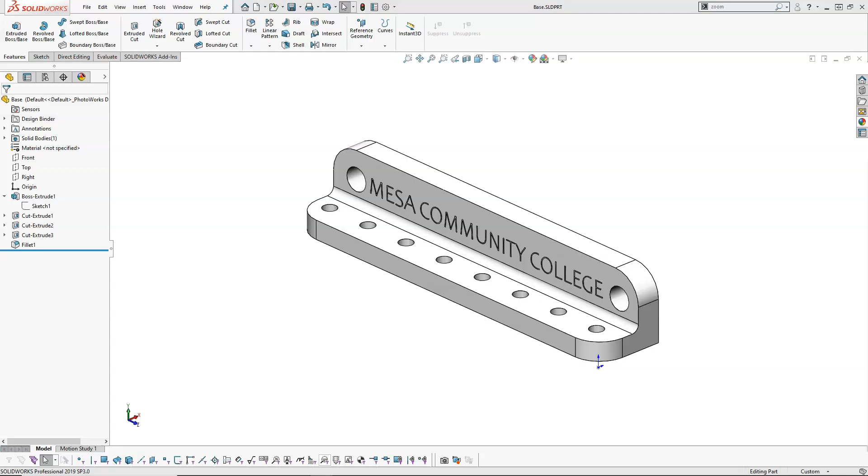The dog bone looking piece is actually going to be 3 parts. We have the crank at 50 millimeters, the follower at 80 millimeters, and the coupler at 160 millimeters. So we need to open up a new part.

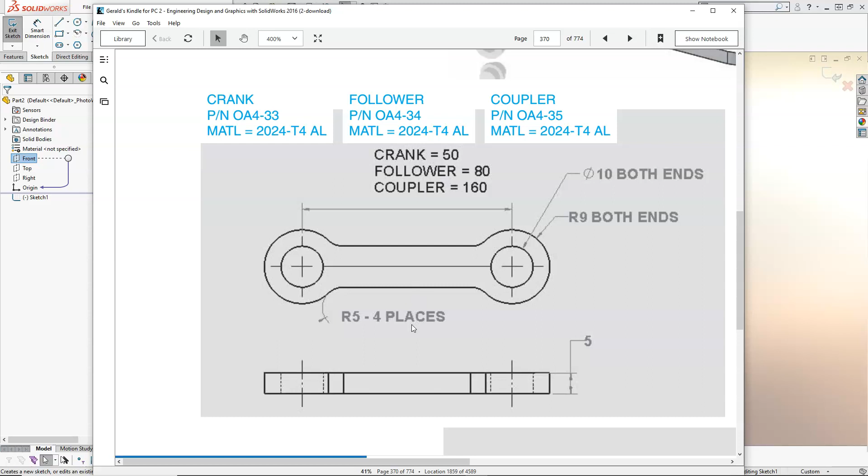And we're going to go through the same basic process. I'm going to open up a sketch this time on the front plane. And for our geometry, I can draw 2 circles. And really I just want to make these very simple. Not quite ready to go into symmetry yet. Maybe we'll establish some symmetry with a center line or one piece of geometry, but eventually we would mirror this geometry or create our symmetry.

So if we go that route, I don't often use the midpoint line. So in our line we have line, center line, and midpoint line. And midpoint line is going to, we pick the origin, and as I drag it's going to go both directions. And I don't know if it's going to give me that dimension or not, but let's go with 25 before I let go of the left mouse button. Put in the 25 and hit enter. And what that does is it puts in the parameters of 50 millimeter, but there's no dimension to drive it.

Alright, so my endpoints are still in blue, and I don't really want this to be an object line for what I'm using it for, so when I select, I'm going to switch it over to for construction, and then we can apply the dimension. And I get the 50 millimeters, which is what I entered. So that portion of it, it maybe saves me 1 step, but I'm not overly fond of the numeric input. It doesn't work with my workflow, so I'm going to go ahead and turn that back off.

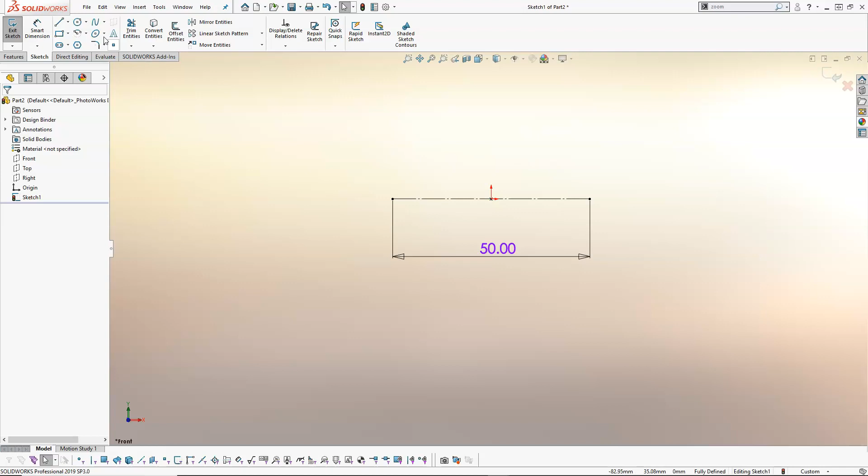But it does give me some locations to place my circles, and as long as I can select both of those, so select the first circle, hold down the control button, select the second circle, and I'm going to set those to make equal or come over to the left and equal. Then I'm going to do the smart dimension.

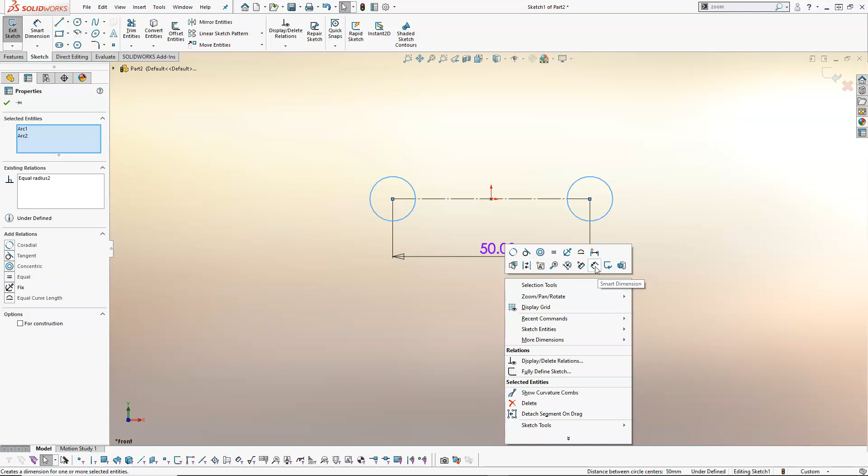So before I apply that smart dimension, let's take one quick look at the parameters again. This is a diameter, so radial dimension would be 5. And again, I can put that parameter in, and it sets the value, but these are still movable. If I grab it, it's going to drag. I'm going to see that number moving. Only the dimension is going to cause this to go fully defined, to cause the geometry to go from blue to black. So we put in the 10, and then I'm going to draw another circle.

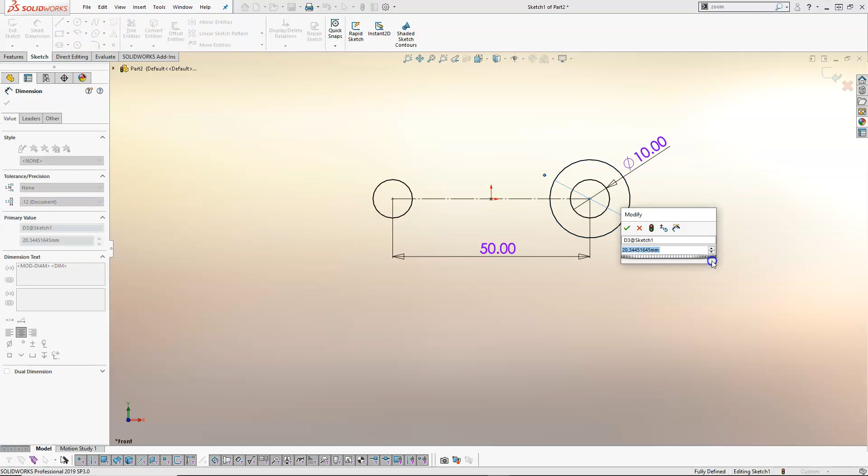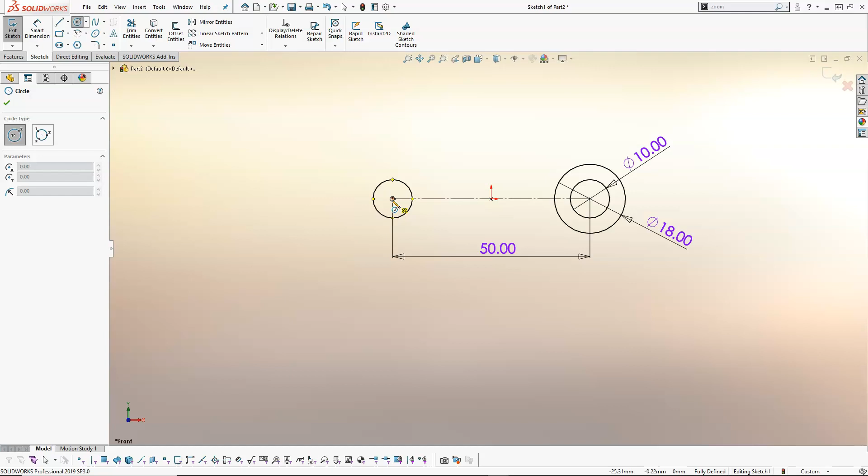And this will be the radius of 9 for both ends. So times 2 will give me 18. Alright, so I can apply that, go back into the circle, pick up my endpoint, and so I'm watching for that little yellow box to pop up. So that one's showing me the midpoint, also happens to be the origin. And just in the frame is picking up the endpoint for it to be concentric. And we're not concerned about its size.

I can again come over and put in the radius of 9, which makes it the right size. And right click and select or escape on the keyboard, but it's still able to move. Alright, so once I hold down the control button, this is still highlighted in blue. I can hold down the control button, hover over the other circle so that it highlights in orange, select it, and then these are going to be equal.

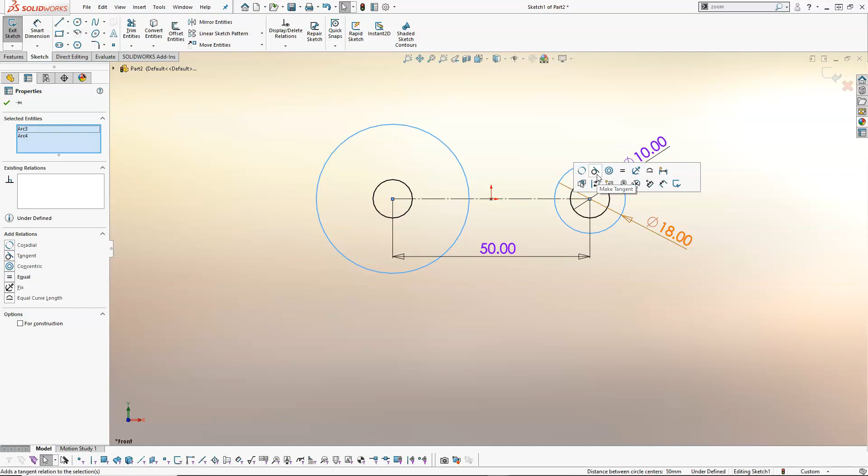Alright, and then I'm going to draw a line. So let me escape out of that. I went up and picked the line, and I'm going to make it coincident to the circle. I just have to be careful that I don't pick up a point that's going to cause this to go coincident with one of the quadrants. So at 0, 90, 180, and 270, we have the quadrants.

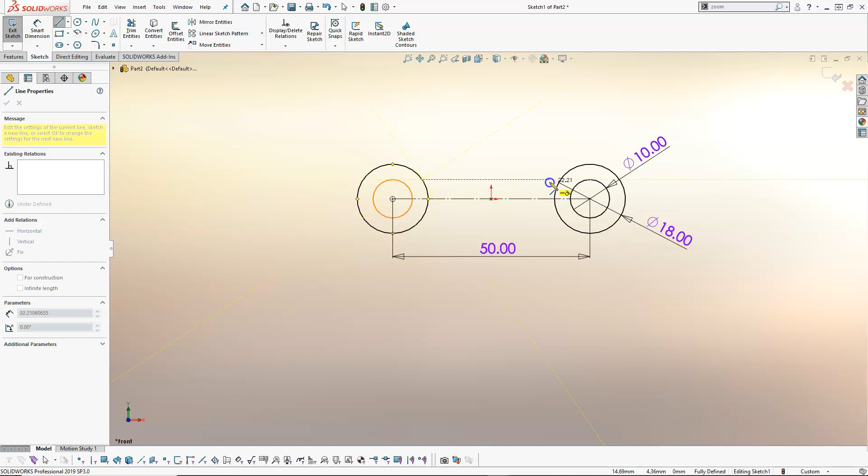And depending on what I see in that yellow box, right now I'm coincident, and we're horizontal. I picked up a horizontal, and that one's showing a tangency. So let's see what we get. So tangent isn't really what I want. This went fully defined. It inferred tangency to this circle. It saw it. It was close enough. I didn't change it. And actually, do we have a dimension?

It might be tangent. No, we don't have a dimension, so that may be my dimension. Alright, well, we can always come back and change it if we wanted to have the 10 millimeters. So if it infers a relation that you don't want, I can highlight that tangency, tangent 6. If I hit delete on the keyboard, that's going to give me the ability now to move this, and the ends will stay coincident, and I'll be able to adjust that thickness.

So again, if there's missing dimensions, you can make your choices, decide what you want it to look like, and then we'll go from there. All right, so we set up and established symmetry with the center line at the midpoint making equal.

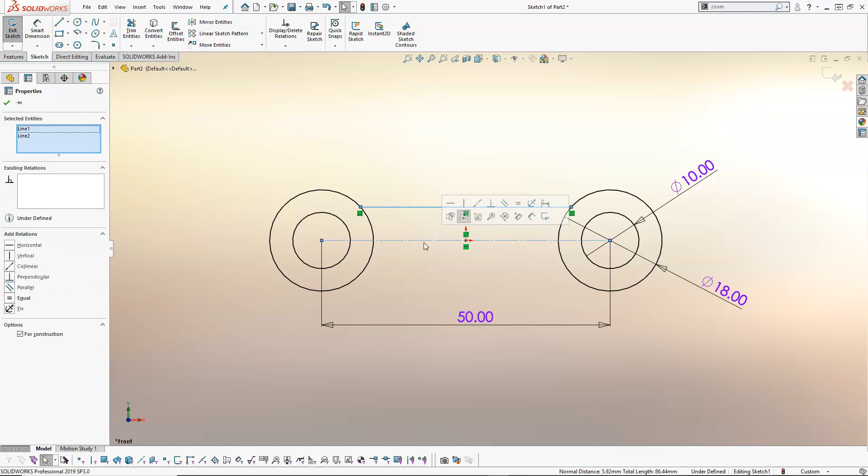Now I'm going to use symmetry by selecting the line, holding down the control button, and selecting the center line. Whenever I have that center line, now I'm going to be able to mirror entities. Once I mirror the entities, then I can place that dimension.

So if I want it to be 10, same diameter, 8, now I have the ability to adjust it where the tangent driving it was forcing it to be the same as whatever on the diameter. Now we have the ability to move it. So we have to make those decisions as we go. So I'm going to go ahead and leave it at 10.

And then my next choice is going to be, do I want to trim these geometries out? My personal preference is to leave it. We have the ability to pick contours in regions, and I'll come back and put the 5 millimeter radius in as a fillet feature in each of the corners, and then I don't have to include that geometry.

All right, but if I did want to trim it out, we would come up to Trim Entities, and wherever I select, I like Trim to Closest. Power trim is going to be wherever you drag it's going to cut, and so in this case it's not really the best. Don't have corners, I don't have trim away inside, trim away outside.

If I'm going to trim, I'm usually just going to trim to closest, and our options here, keep trim entities as construction geometry. Don't remember that one, so it must have been added in the last version or so. And ignore trimming of construction geometry. So in that case, we could potentially bypass that center line.

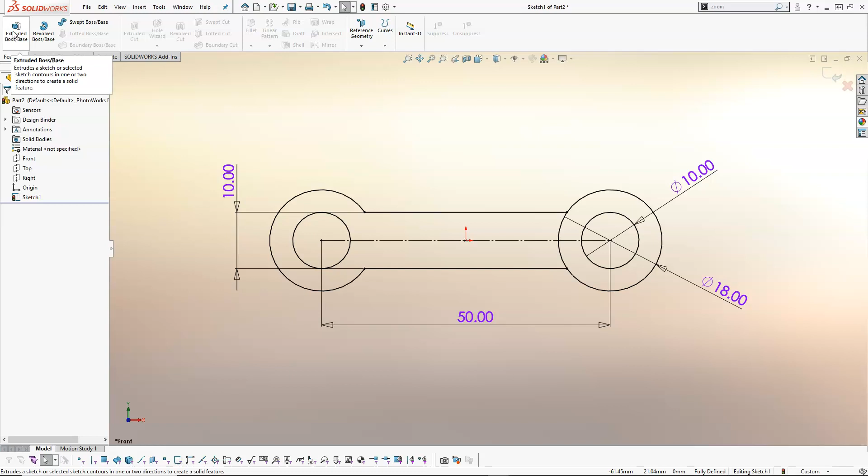All right, so the thickness is 5 millimeters. I'm gonna go up to the Features tab, go into my extruded boss base, and put in the 5 millimeters. All right, so because this circle, instead of making one consistent shape that it can calculate, it has these two separate regions. So as these highlight, because of that intersecting, that overlapping geometry, it automatically goes into selected contours.

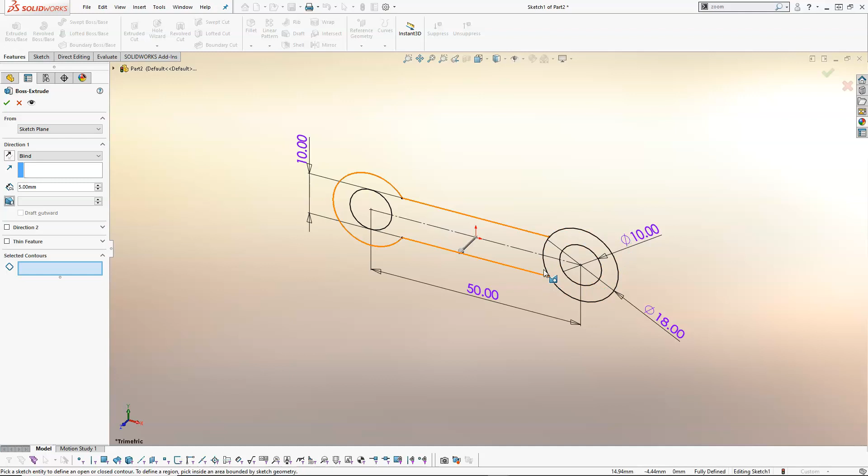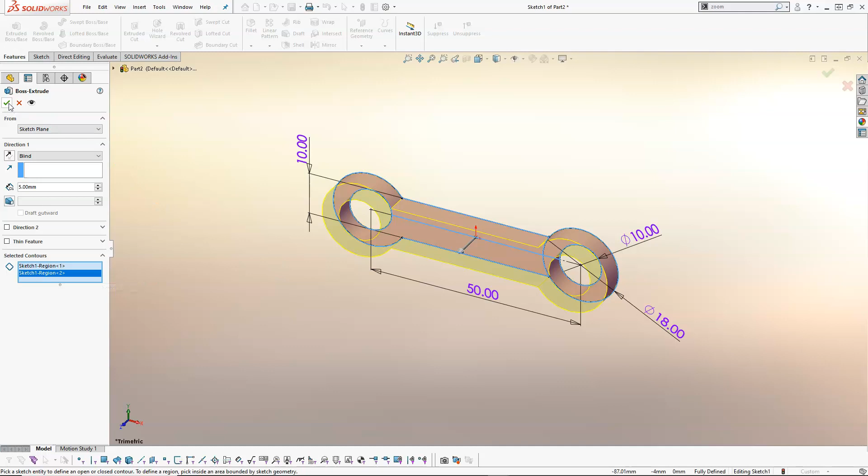So contours in regions are, a contour would be the outside shape if it was all the way around, and the regions are what is highlighting the donut and kind of the key shape. So if I pick and I pick, that's going to give me the geometry. If you trimmed out both sides, it should automatically go to 5 millimeters. You won't see selected contours. You would just have the net result. All right, so that gives us our shape.

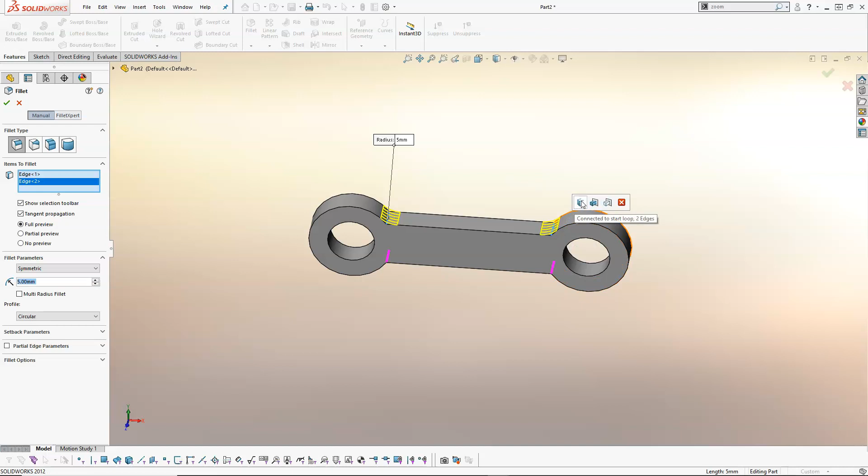And then I'm going to pick the corner geometry, go into the fillet, and we said the fillet was 5 millimeters. And so when I pick the other fillet, then I'm going to wait, and that pop-up, connected to start loop, everything, and then connected to the edges. So I just want those internal, and we'll go ahead and accept.

Alright, so I'm going to save this. The first one is the crank, and we save. And I'm going to immediately come back up to the standard toolbar and go to Save As, so that I can create the follower. And if I save as copy and continue, then it will stay within the crank part file. But if I save as copy and open,

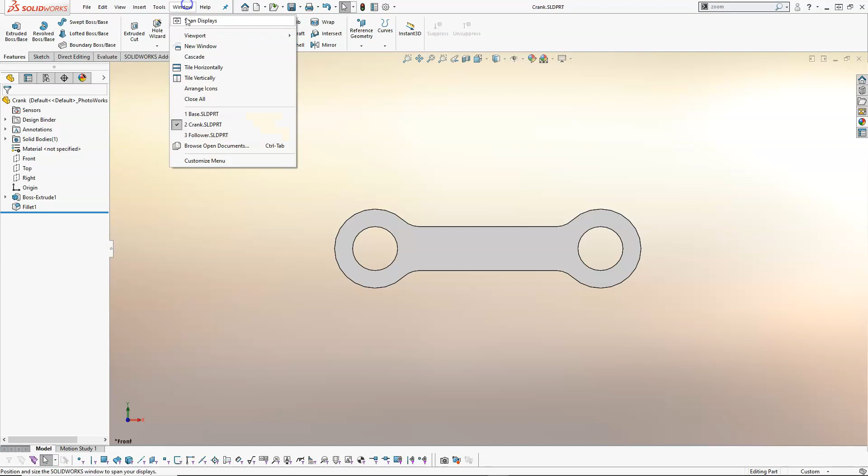now we went from crank to follower, and if I go over to the window, I can see that the base is open, the crank is open, and the follower is open. Alright, the follower right now is still the same as the crank, so we're looking to generate the new geometry. So I can expand out, double click the sketch, and the difference here is if I rotate over a little bit, I'm going to see all of the sketch dimensions.

If I go to Boss Extrude 1, somewhere in here I'm also going to see the depth of the extrude. And usually that shows up in a different color. Oh, there it is. The extension lines are in that darker blue, where the extension lines of the sketch are in black. Alright, so the follower is 80 millimeters, and nothing happened, which is kind of to be expected.

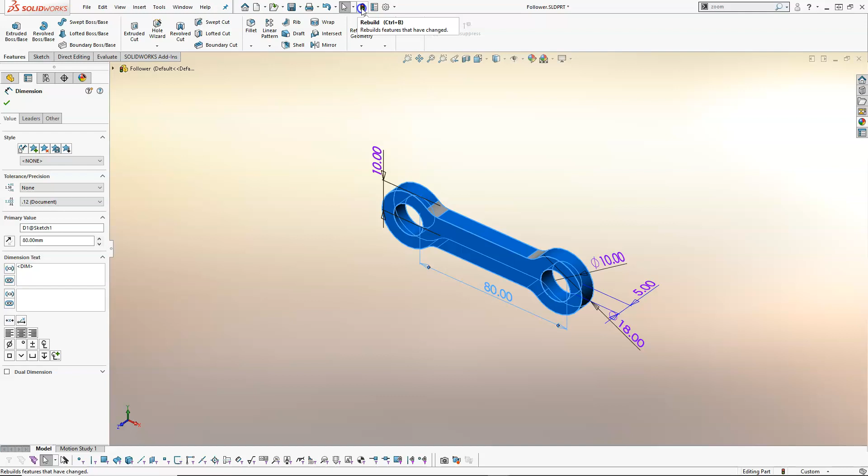We need to rebuild. So when I hit the rebuild, it's going to stretch it out, and we can save it. And then I can go through, and same as hitting the save icon, I can come over to the file pull down and hit Save As, and the follower will now be the coupler. And I want to do the same thing, save as copy and open. So now I'm going to have all 4 pieces open in the file.

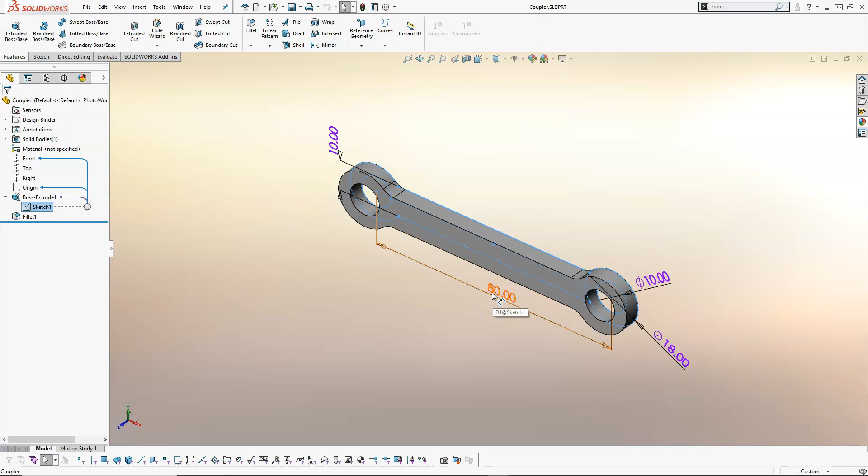So in years past, versions past, we wanted to be a little careful about how many open files, that if we ran out of RAM memory and started having issues, it could crash the software.

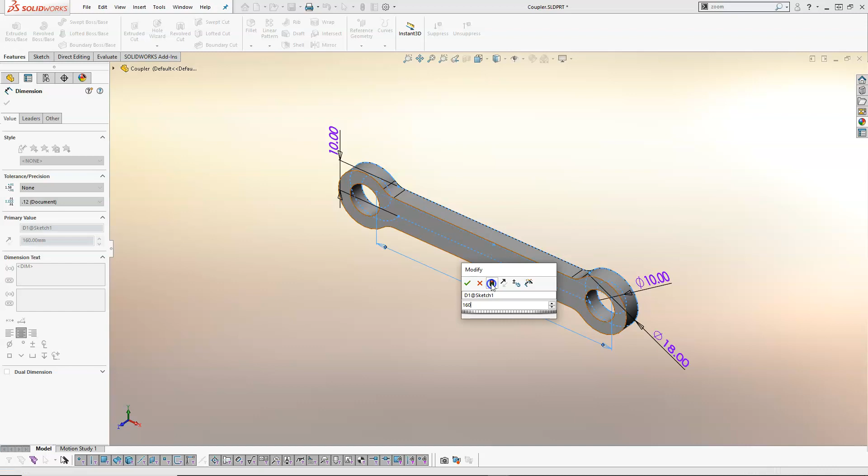So I've put in the 160. If I want to regenerate the value now, I'm going to go ahead and hit the little stoplight and let it update, and then go ahead and accept. Alright, so I double check my file name, coupler, and then save it, and now we have our 3 parts fairly quickly.